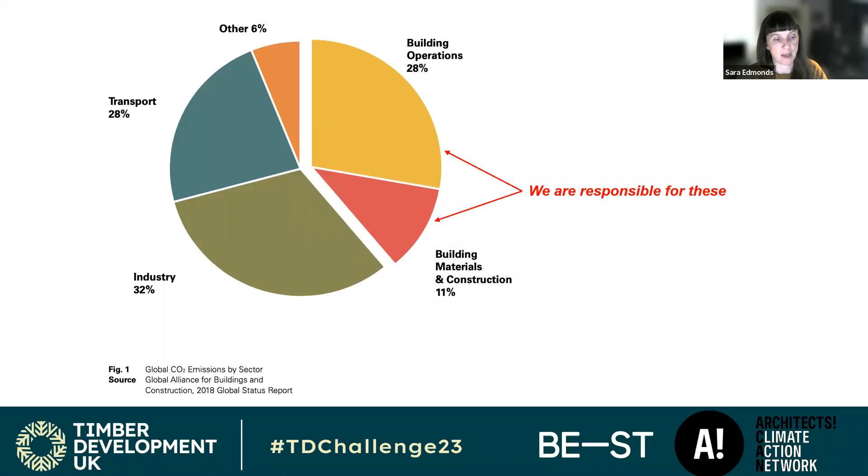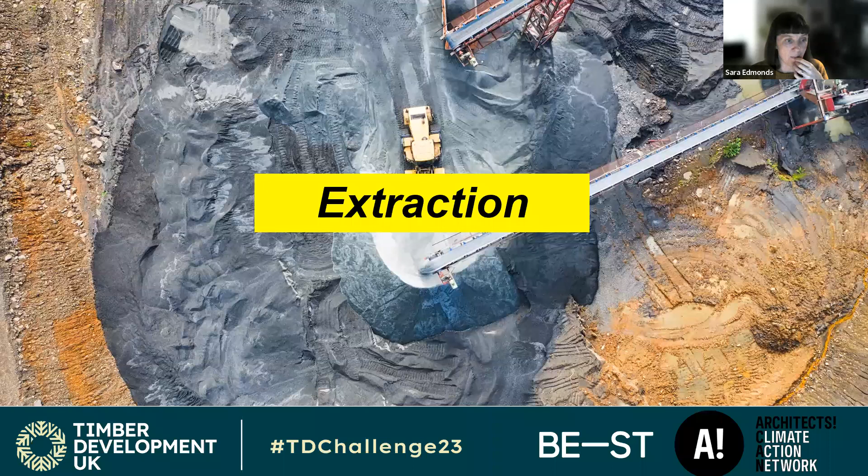So we can start to see why it's really important to interrogate the nature of the projects that we work on and consider their whole life impact. Currently, the systems we operate within are based on a linear approach of extraction, manufacture, construction, demolition, and disposal.

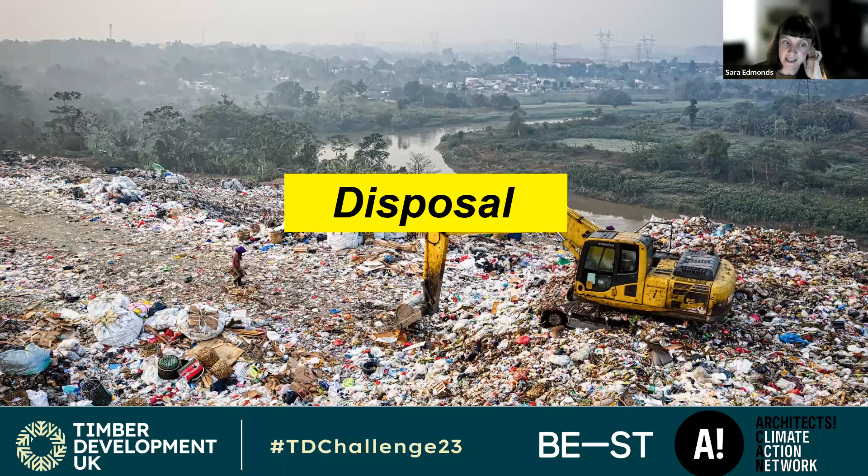But we really need to be moving away from this. I feel like I'm preaching to the converted, I don't think anybody believes this is the way we need to be operating, but repetitive messaging is important just to remind us that this isn't okay. We need to move away from this linear approach towards a circular and regenerative set of systems. To what end are we going to go if we continue this resource extraction to waste? It's a finite planet, so we really need to be moving towards a more circular approach.

So isn't it time to consider building nothing new? I do really like this question, because it makes you really consider what it means to build nothing new. It doesn't mean everybody down tools, walk away, there's nothing left to be done. There certainly is a lot to be done, but we need to understand what we're building with.

We need to understand the impact of our approach to projects, how we specify those projects, where our materials are coming from. I often say there's never been a more creative time to be an architect, because you have everything you need in front of you. The building you design, the shiny new thing, does not make you an architect. The way you think makes you an architect.

This comes down to the approach architects generally take anyway. There's the traditional thinking of, I have this problem, here's my solution. But actually, we understand the planet is an interconnected, woven web of systems, and we need to be thinking that way too. We need to be developing our thought processes this way. I think architects are important in this space because we approach things in this holistic way, and this is a key part of the approach to retrofit.

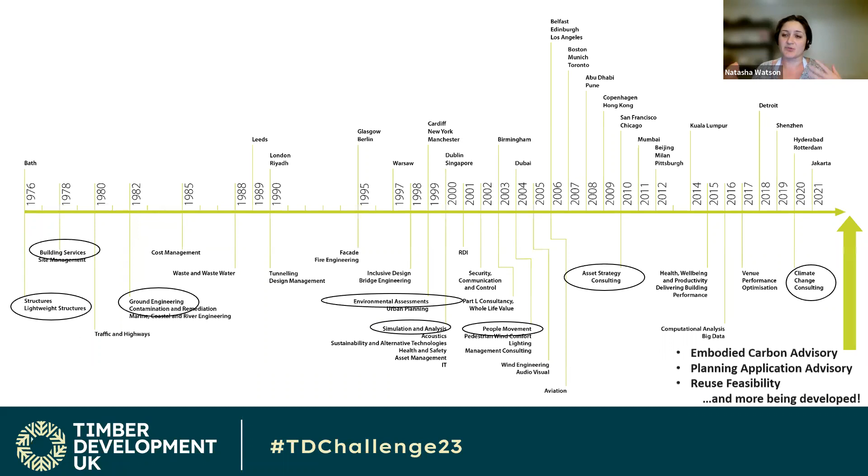But what we're seeing is actually, I think, a really exciting stage of growth where we're seeing how all of our different specialties are coming together to provide new advisory roles and new ways of working together. I think it's actually, you know, the way that we can now talk to each other a lot more online. Offices that have those different disciplines might not have ever really spent that much time together. So that's one of the reasons why, from February this year, I was made the UK embodied carbon lead for structures as well, because I felt like I could actually support the rest of my fellow offices in being able to provide that. And that's kind of led on to planning, application, advisory, reuse, feasibility, and much more as well.

So one is to build nothing, rethink what we actually need our spaces for. The second is build less, which really focuses on retrofitting and reusing the valuable spaces that we have now. Moving on to building clever, where we look at lower impact building materials such as timber, and then building efficiently.

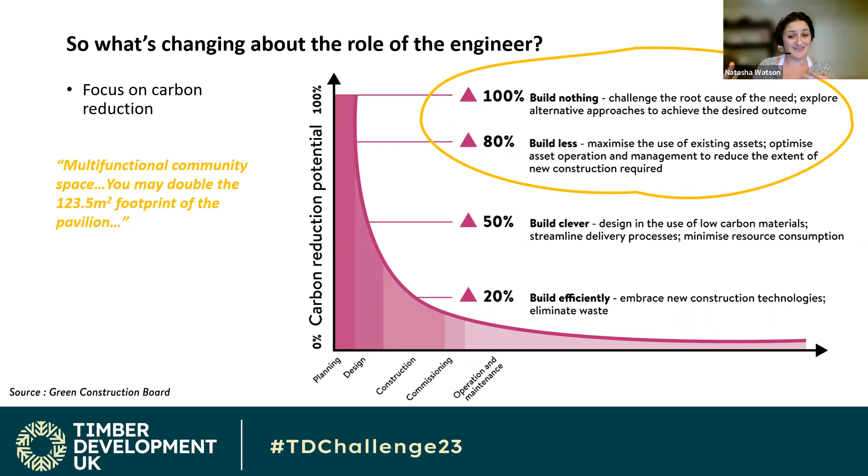So making sure that once we've done all of that, we don't take our foot off the pedal - we're actually making sure we're using that timber efficiently. With this particular brief you've all been set, you're aiming to create a multifunctional community space, and you may double the footprint of the pavilion, but doubling is a maximum. If you don't need to use that additional space, maybe don't use it. Definitely interrogate exactly how much space you do need when you're looking at the brief.

Second point, what's changing about the role of the engineer? Typically we would get involved a little bit later in projects, a little bit later than architects, and we would ramp up our resource and effort on those projects to really drill down into the calculations and technical design.

But what we're finding now is we're being employed very much earlier on projects, and we're spending that time, thankfully, talking to clients, talking to architects, and really focusing on making sure the right concept options are the ones being taken forward.

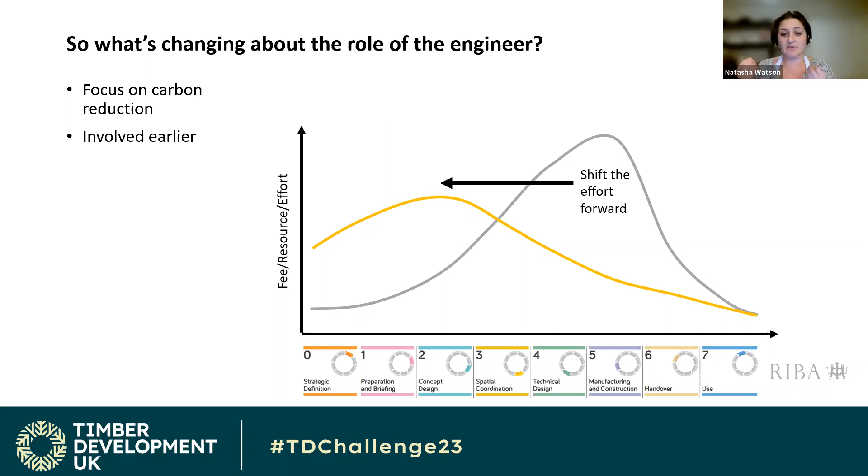And if we are going to be touching the earth lightly, reducing the amount of material we're putting in our buildings, reducing the amount of space we're creating in the first place, it does mean we're not going to be churning out reams and reams of calculations for massive buildings. We are hopefully going to spend that time thinking, discussing and formulating options, and then doing very choice, particular and focused studies where we do need to put those interventions.

The third point is pretty much similar to being involved earlier - we're more about the why rather than just the how. In particular reference to retrofitting of buildings versus new buildings, I quite like this way of looking at the requirements and then the space you create.

On quite a few projects I've worked on in the past, and unfortunately will probably still work on, less and less hopefully, it's a case of taking unchallenged requirements and then creating a new building to suit those requirements. When you've got an existing building, you can't really do that - you should adjust your requirements for that building that you already have.

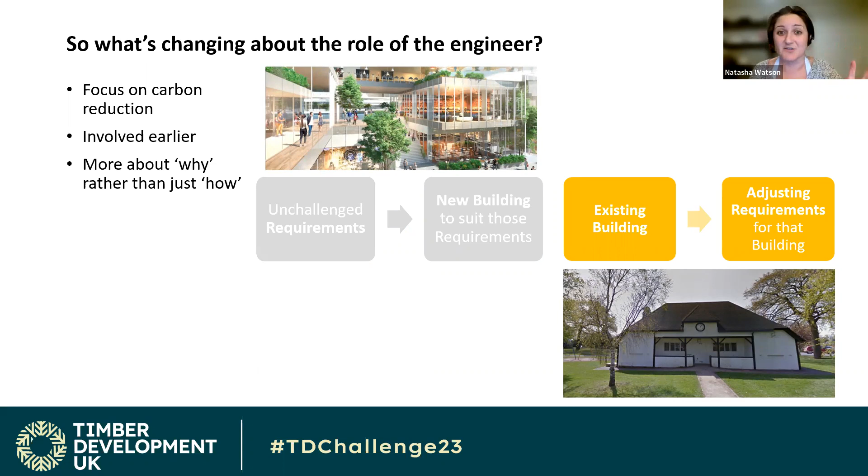In the case of this project, we are focusing on this pavilion, but it does mean we need to be very sure that when we look at new buildings, we don't get suckered into the greenwash. That image up there looks very lovely, but if you dive a bit deeper, it's got very large spans, it looks like it's all concrete. They've essentially greenwashed by putting lots of trees everywhere. So just focus on that.

New buildings may look very fancy, but they're designed that way to try and get you engaged and draw you in. But hopefully by working on this particular project, you'll fall in love with the really creative and really unusual spaces that you can create when you're retrofitting a building.

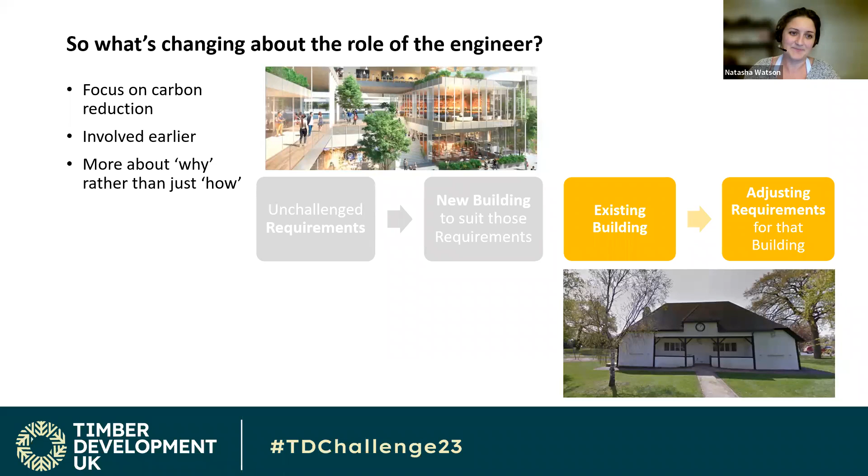We are also improving our different levels of reuse understanding. When we typically work on retrofitting buildings, especially if you haven't worked on one before, it might be quite easy to fall into that binary way of thinking - either reuse everything or demolish and start again. But actually, this is quite an old concept model by Brand from 1995, looking at buildings as a series of layers.

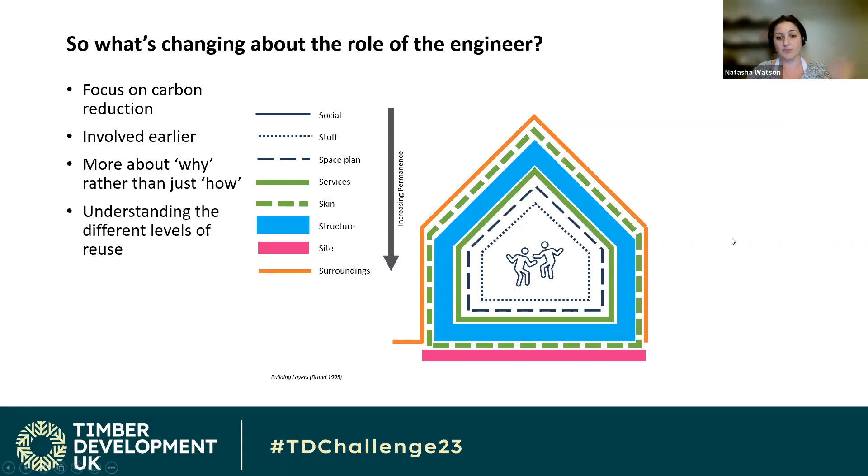And these layers have differing permanence. Going from the social, the people inside, and then the stuff and the space plan, they can be changed - people will flow continuously through a building, but when you're looking at your space plan, maybe you change that every 5 to 10 years. Then going into your services and facade materials, maybe that's every 15 to 25 years. And then structure, typically 60. And then going into your site and surroundings, which hopefully will be there forever.

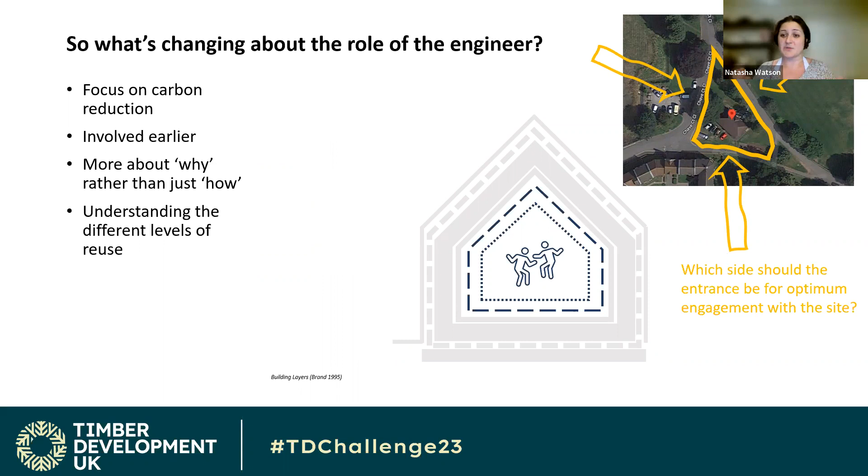When you're looking at those different levels of permanence, maybe try and ask yourself different questions. Which side should be the entrance for this new pavilion for the optimum engagement with the site? When we look at the services, do the lights still work? Do we need to replace them? Do we need to have a new heating system? What is it going to be used for?

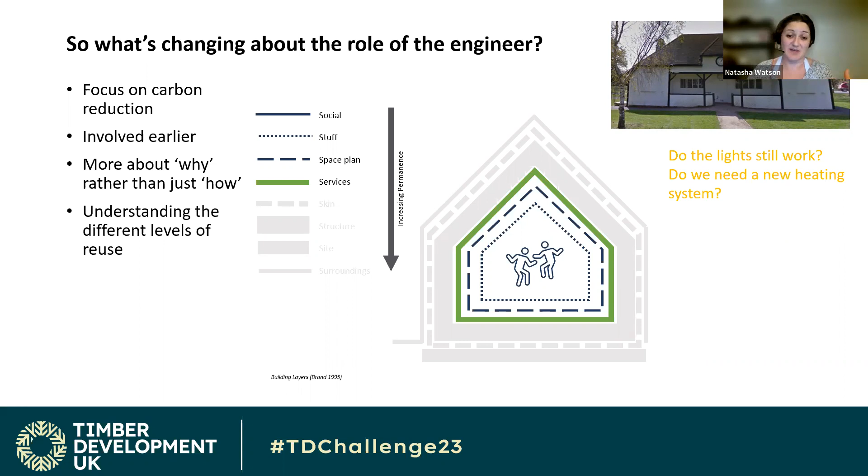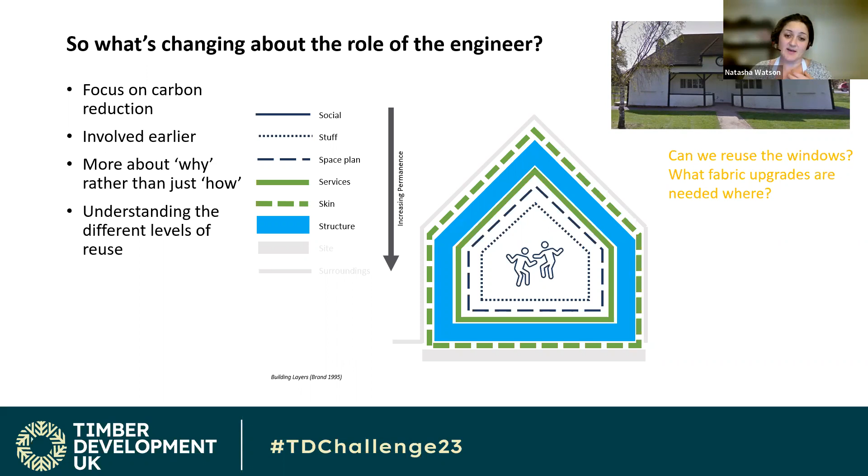Does it have to be 20 degrees C, 365 days of the year in that space? Maybe not. Look at potentially reusing the windows if you're going to be replacing them. Are there any fabric upgrades needed? Where exactly are they needed? Are they needed everywhere? Asking these questions based on the different layers of the building will hopefully mean you really interrogate what's there and what actually needs to be replaced.

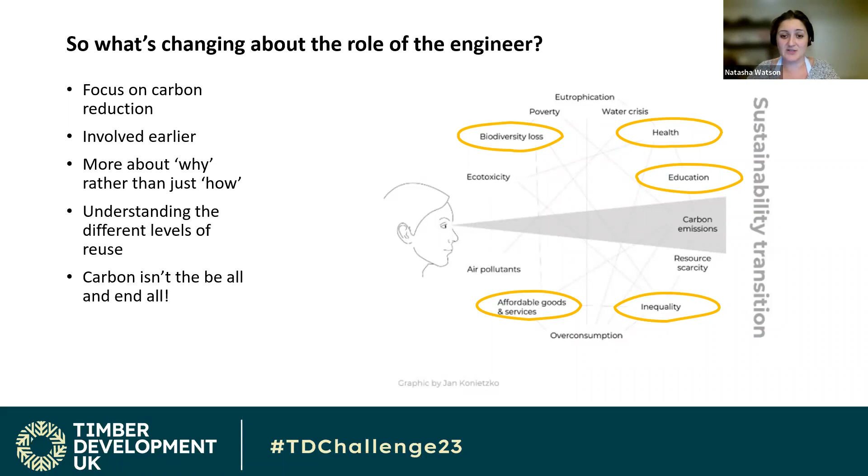Even though I'm the UK Embodied Carbon lead, I know, like hopefully lots of other people, that carbon isn't the be all and end all when we're talking about sustainability. Unfortunately, I've definitely seen a lot of people getting what's known as carbon tunnel vision, to the detriment of lots of other really pressing issues. I've circled a couple here which might be relevant to your brief and the projects you'll be producing. However, it's not up to me, it's up to you. So hopefully you won't get carbon tunnel vision, and you'll really embrace all the challenges and opportunities you can find on this project.

Thanks, Natasha. No problem. And Kate, the landscape architect, often gets left out of the picture altogether. Indeed, well, not so much these days. Okay, is that working, Tab? Perfect. Cool. Okay, hi everyone.

I'm Kate Blackburne, landscape architect from Exterior Architecture. As Tab was just saying, landscape architects historically have been kind of forgotten about sometimes on schemes, but it's great to see things are changing now with the backing of new policies and directives from the government. Landscape is now very important on all new developments and retrofit developments as well.

So looking at opportunities for introducing sustainable and climate change mitigation measures on all schemes is something we take very seriously. Our practice works across a range of schemes, big scale, small scale, huge campuses down to residential developments, and some retrofit as well.

I've got some examples of that in this presentation. So as Natasha's just been talking about the changing role of the engineer, I thought I'd do a similar thing for the landscape architect. As I mentioned, these policies are really helping us have our seat at the table, which has become much more important. We're being involved in projects a lot earlier to make sure new schemes can meet these government policies. And in London, we've also got the urban greening factor policy too.

The biodiversity net gain policy says that all new developments must have a 10% net increase in biodiversity across the site, which is calculated by the project ecologist. They'll look at what the baseline habitat is on the site, and then we'll work with them to make sure we can retain or exceed that as part of the new development.

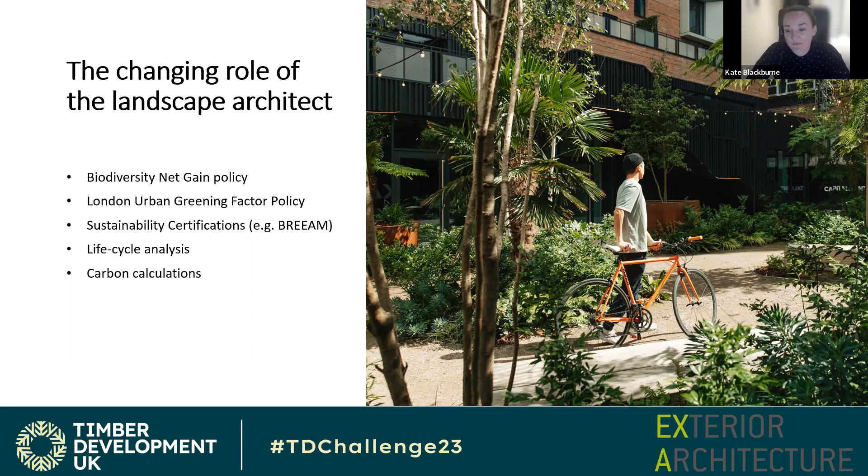So in the broader picture of sustainability, these are the key landscape focus areas we would focus on. Environment is probably the key one for us - thinking about green and blue infrastructure on a wide scale, trying to provide a high level of biodiversity and increasing habitat areas, having a resilient and high quality microclimate, water sensitive design. Carbon's probably next on the list - thinking about low embodied carbon materials and low energy use strategies in the landscape as well.

Social sustainability is also very important and something that's key in landscape design, and definitely for this cricket pavilion as well. So thinking about how people are going to be using the site, thinking about communities, thinking about safety and overlooking and those kind of things too.

Zero waste and circular is a very interesting one, particularly in retrofit. Obviously we're reusing the existing building, but perhaps there are other features on site you may be thinking about getting rid of. The landscape is an excellent tool for rehoming those on site rather than sending them to landfill. For instance, trees that might need to be removed to make way for the new building, we should absolutely be looking to keep that deadwood on site. It makes a fantastic habitat feature for invertebrates and beetles.

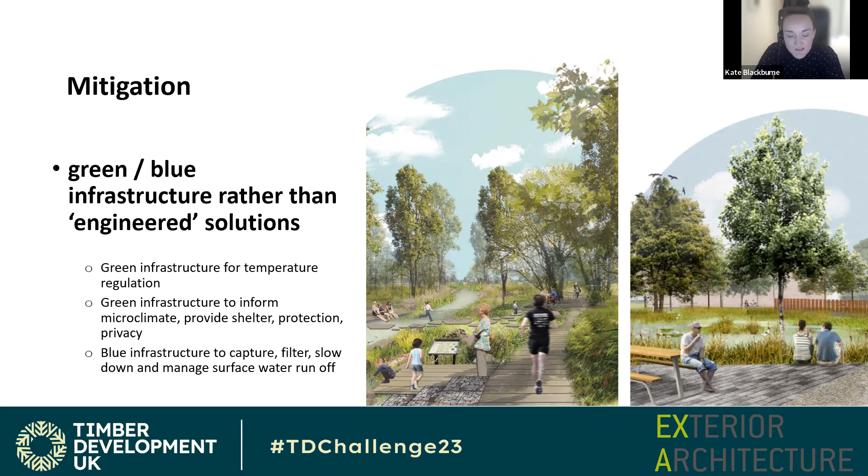Same with green infrastructure as well. Trees and planting are great for temperature regulation inside buildings too. Biodiverse roofs are great for bringing down internal temperatures and keeping the heat in as well. Trees outside of buildings have been proven to reduce heating and cooling requirements internally too, as well as for people sitting outside, where you obviously get shade and the heat benefits.

Low carbon materials and practices - I was trying to think of what might be useful to include on this. I think if you're looking for a resource for what type of materials are good from a sustainability perspective, the Green Guide is quite a good place to look. Their website actually lists different materials based on categories.

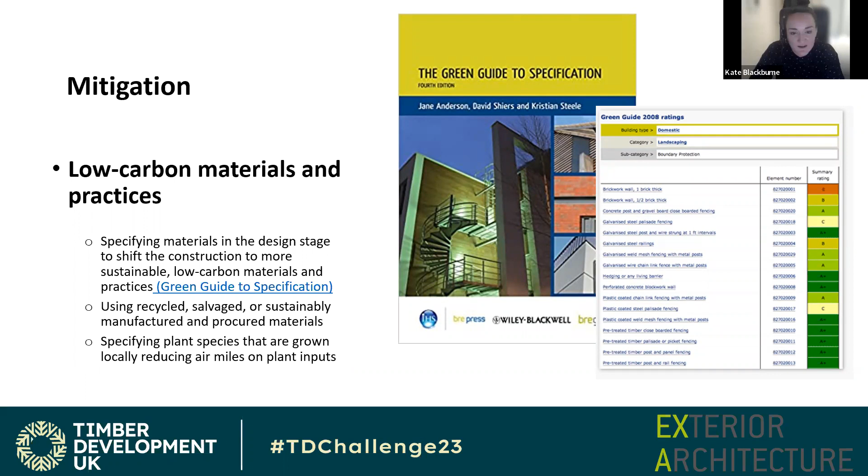But as I mentioned before as well, upcycling, recycling materials, and also specifying plants that are grown locally and are endemic to the area is a great way to do that too.

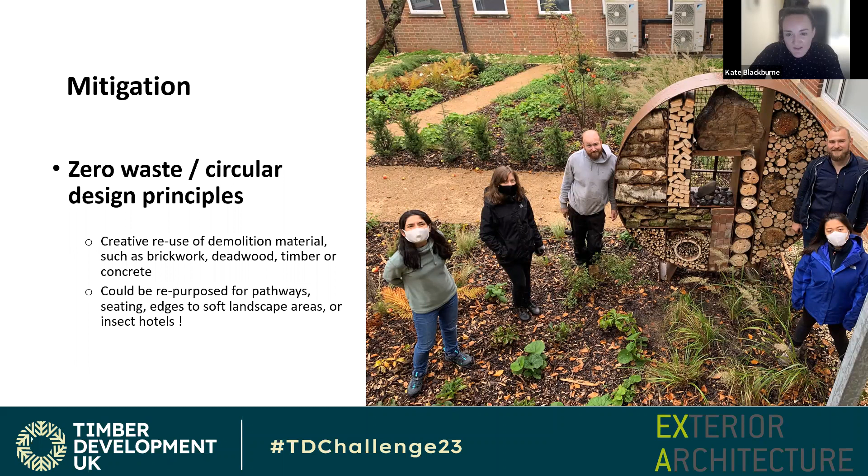In terms of green infrastructure, I think it's most important to look at planting types and tree types that are most suited to the site. They're going to do the best under those conditions, and they also help establish the character of the site, rather than making it feel like you're in a different country or a different part of the UK.

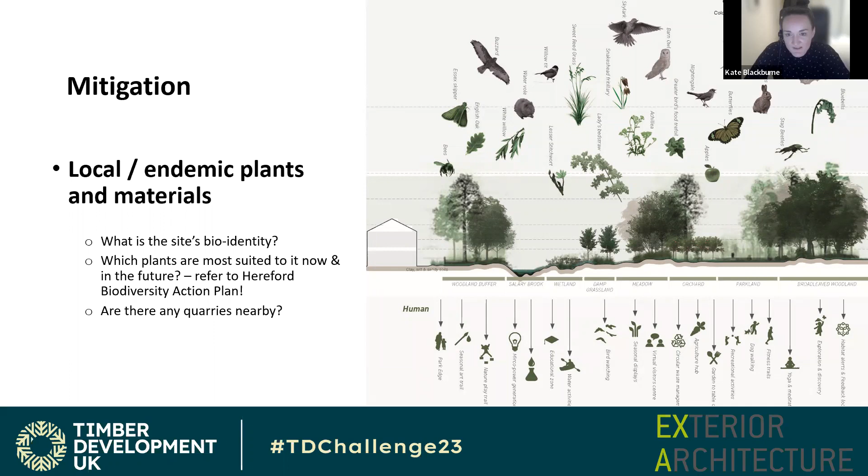So the best place to look for that will be the Hereford Biodiversity Action Plan. I've put a link in this presentation at the end to that, but it's got all of the key target habitats that they're looking at in the area, and should give some idea of species, both flora and fauna, that would be good to support on the site.

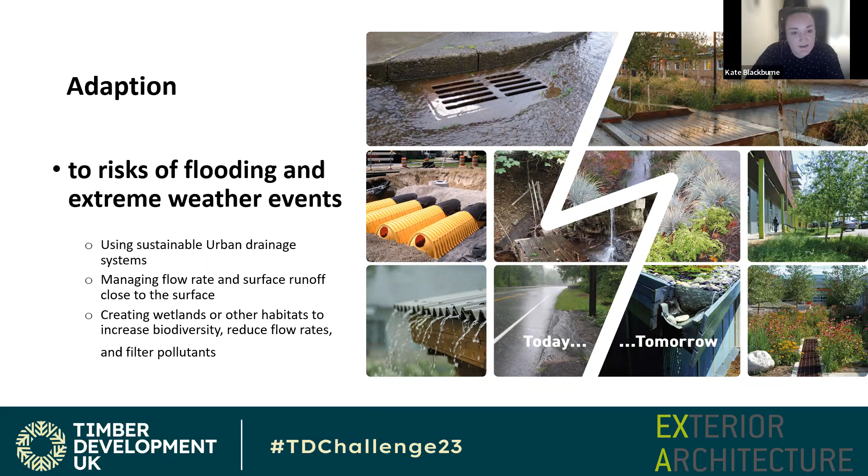So, adaptation to the risk of flooding and extreme weather events. I think I already mentioned this, but managing surface water runoff on the site as much as you can, dealing with those flood events in creative ways. I'm just going to skip through that one.

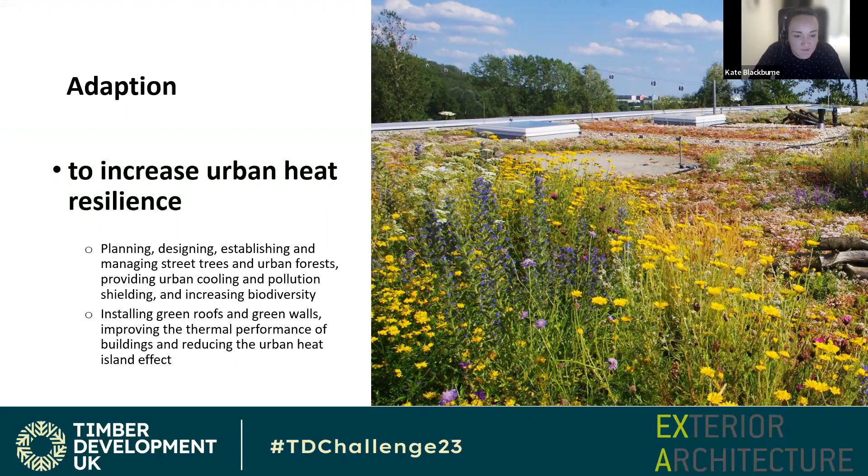Talking about green roofs and green walls, I don't know if there's scope to have a green roof on the building, but it is a great way to reduce urban heating and provide temperature regulation internally to the building.

Adaptation to water scarcity - thinking about where the water's coming from and where it's going to, perhaps using the building, thinking about blue roof systems, or capturing and harvesting water for irrigation purposes, that kind of thing is something we often think about.

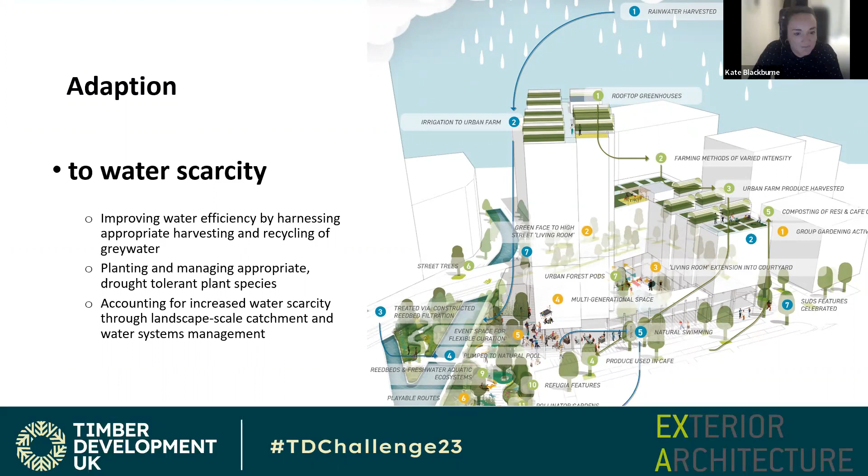Overarching all of this, there's lots of talk about sustainability and carbon and those kinds of things, but what's equally as important is how the space is going to be used. Given that your site is a cricket pavilion, it's going to be a very social, community orientated space. So what we want to avoid is doing something very much in favour of nature and leaving out all of the people. We've got to think about how these two things can come together and work in harmony, making the climate change reducing measures a feature and something for people to enjoy and inhabit.

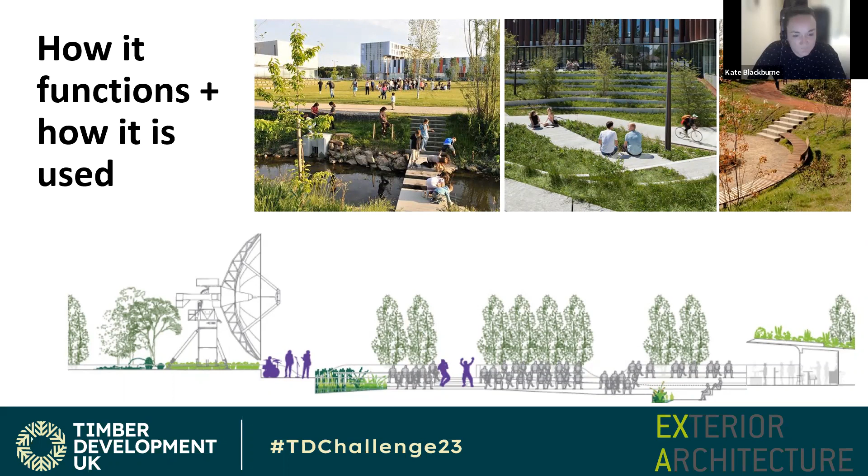Thanks, Kate. And it's why landscape architects need to be involved as we move to a new way of understanding the built environment.